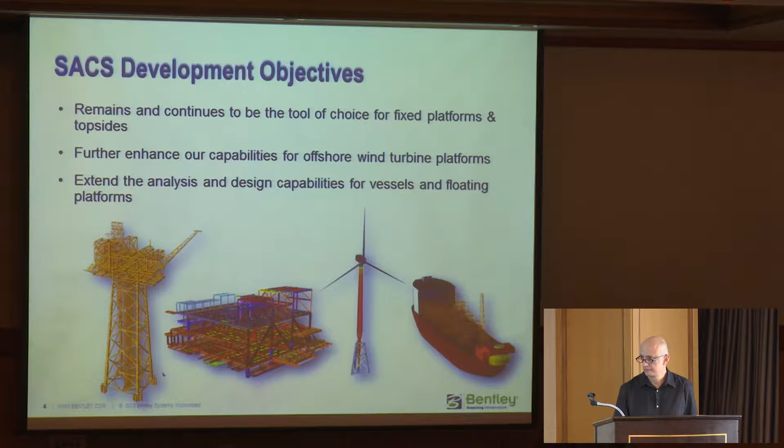And with the Moses product, we want to extend the analysis and design capabilities for floating platforms.

And here's a brief timeline of our releases since we've been acquired by Bentley.

In November 2011, we released the SELECT version of 5.3. This is essentially the same as the version you had with the dongles, except for a few minor bug fixes, still based on dongle licensing.

Then in May 2012, we released 5.4.

And in December 2012, we released 5.5.

In October 2013, we came out with 5.6.

And then earlier this month, we released the 5.7 release.

So briefly, let's discuss how we go about balancing our development.

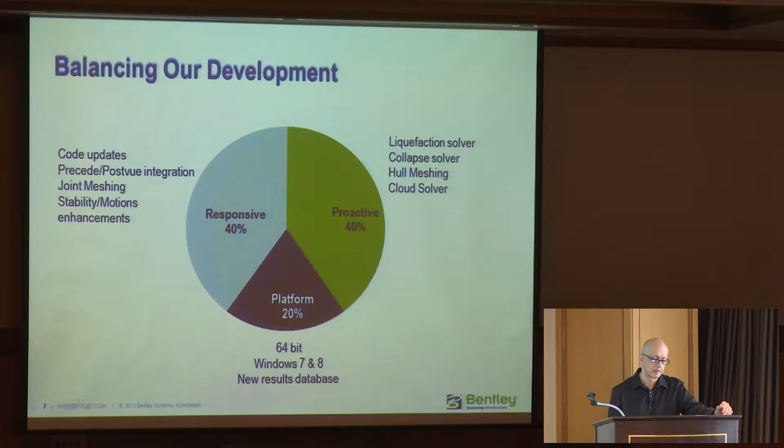And by proactive, we mean items that we think you may find useful for your engineering to make you more efficient. And platform updates are such as moving over to a 64-bit processor, moving on to Windows 8.

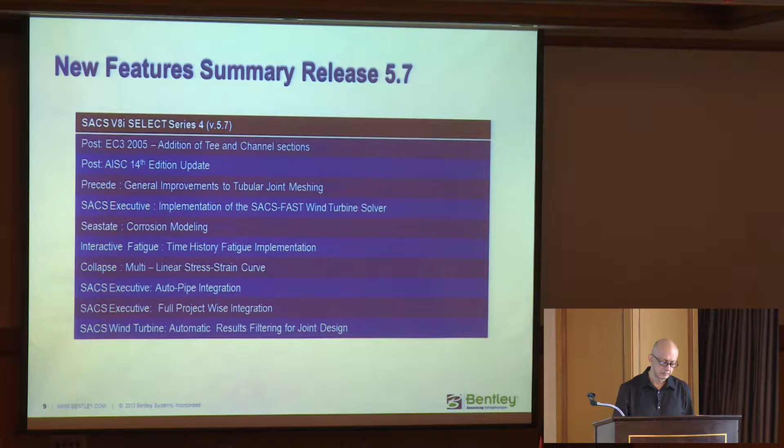I'll go through some of these in detail. Looking at post-processing first.

Basically what we've done with 5.7 was we continued developing our Eurocode. In this instance, we added two section types to the Eurocode itself. And on top of that, we also implemented the AISC 14th edition.

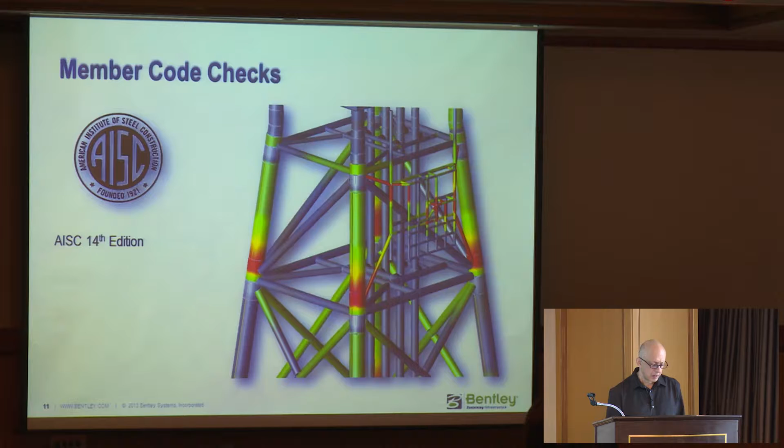In addition to that, we've continued our improvements in non-tubular joint meshing. The meshing capability allows the user to vary the mesh density, and the user can also define measurable lengths of each member.

Now we've been meshing tubular joints for a while, I think since 5.3. This video shows how easy it is to mesh a tubular joint and include it in the overall SACS model.

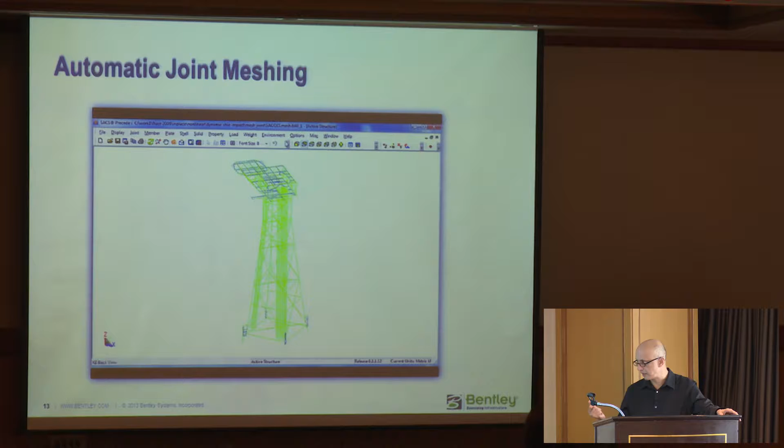The user simply selects a joint out of the model and basically clicks a button, and it'll automatically mesh that joint and insert it back into the model.

So once we started doing this, we had users coming to us and saying, look, we do a lot of topside design and there are some very complicated joints on the topside that we'd like to mesh.

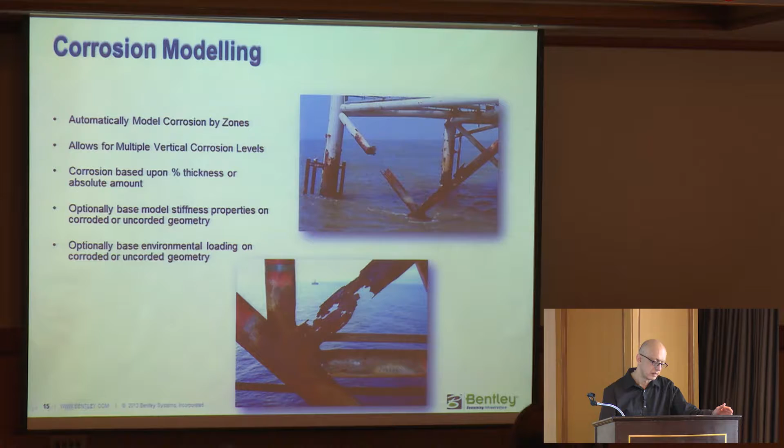Again, this little video shows you how easy it is to mesh joints on the topside. Hang on, let me go back. He won't play. Here we go.

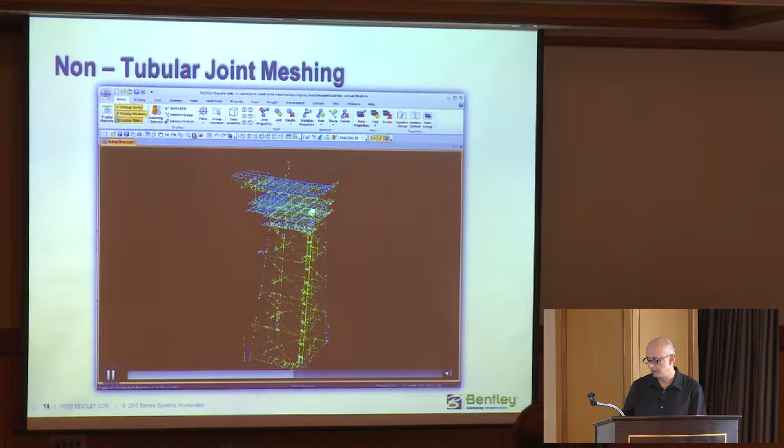Is it moving? Yeah. For instance, say I want to mesh that joint. There's a joint meshing routine called joint mesher in Precede. You simply select the joint, and here you can actually change your mesh density and the lengths of each element that needs to be meshed.

The actual meshing algorithm will mesh that joint and insert it back into the overall model.

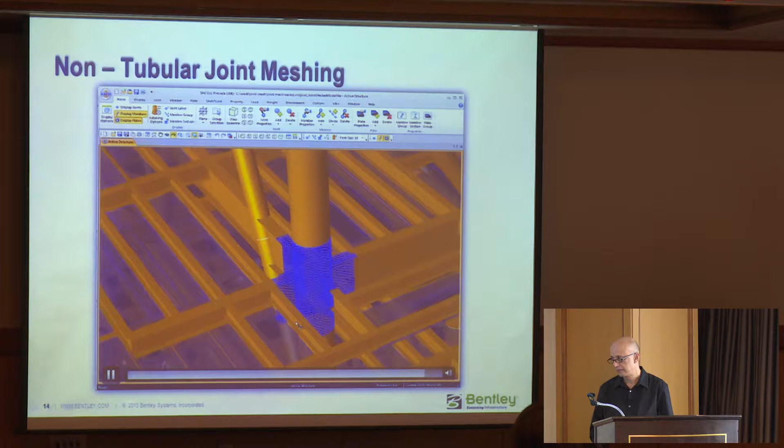Now obviously we can't handle 100% of all different types of joints, but with each release, what we're tending to do is improve or give you more capability on different types of joints.

The other item we added was corrosion modeling. Here the user can model corrosion by zones, which are vertical zones, and you can have multiple levels with different amounts of corrosion. You can base the corrosion on percentage thickness or an absolute value.

The user can optionally base the stiffness properties either on the corroded model or the uncorroded geometry. Also, as far as the loading is concerned, this could be based upon the corroded or uncorroded geometry.

Note here, you're not actually going to change the dimensions of your model. We'll do that automatically for you internally.

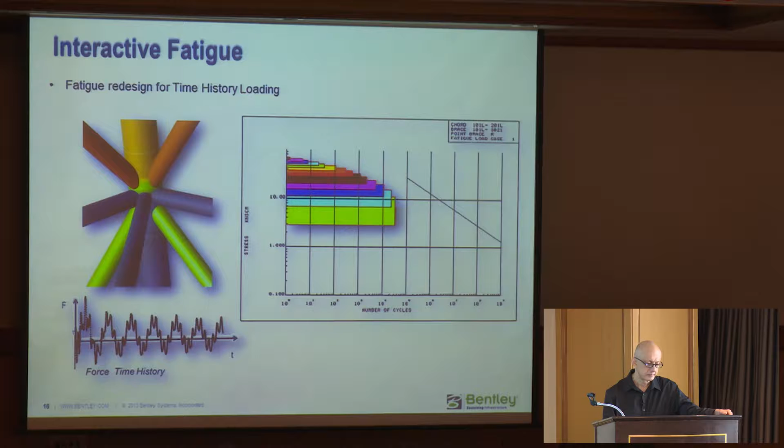Looking at the enhancements to our non-linear capabilities, in particular the collapse program.

In the past, we've only been able to handle bilinear stress strain properties. With 5.7, we've increased the capability to allow the user to input a multilinear stress strain. This should give you a much more accurate prediction of failure loads.

The other update we made in 5.7 is an interface to AutoPipe. This was requested by a lot of our users who design topsides for FPSOs. They wanted a capability where they can take piping loads and transfer those directly onto the support structure in SACS.

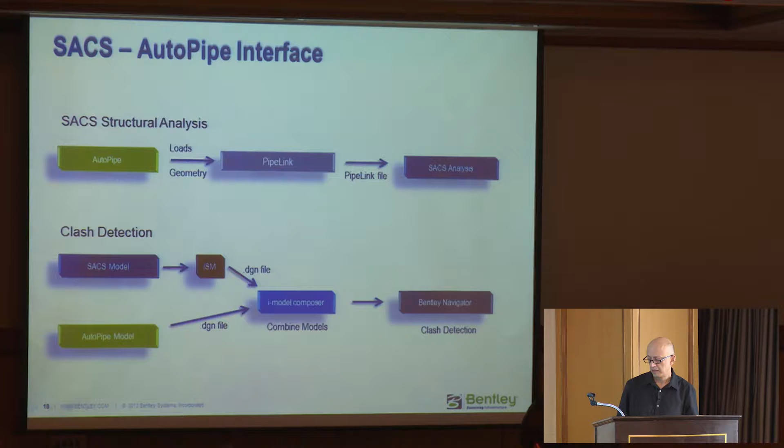AutoPipe can generate the DGN file directly, and again we put this into the iModel Composer and combine the two models.

Then what we can do is use the Bentley Navigator to detect where there are clashes between the piping and the structure itself.

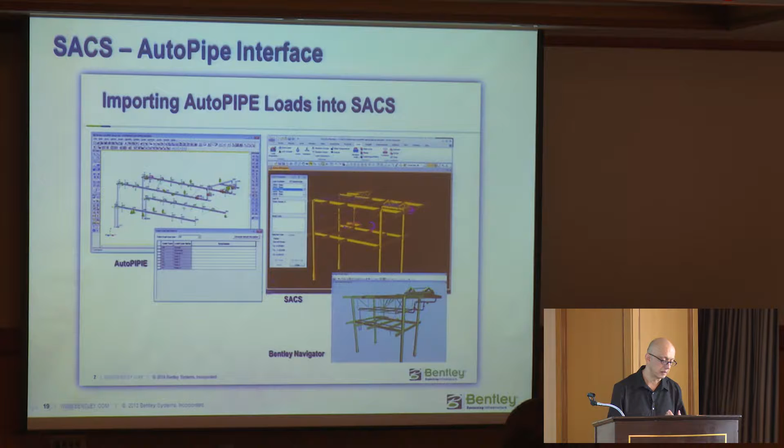This little movie here will show you how the AutoPipe link works. This is your structural model with the piping rack, and this is your AutoPipe piping model in AutoPipe.

So in AutoPipe we can export to pipe link. In this case we're going to export the load cases into pipe link. Once we've done that, we can export the geometry to an MDB database.

Once we've done that, we can import the pipe link file into SACS.

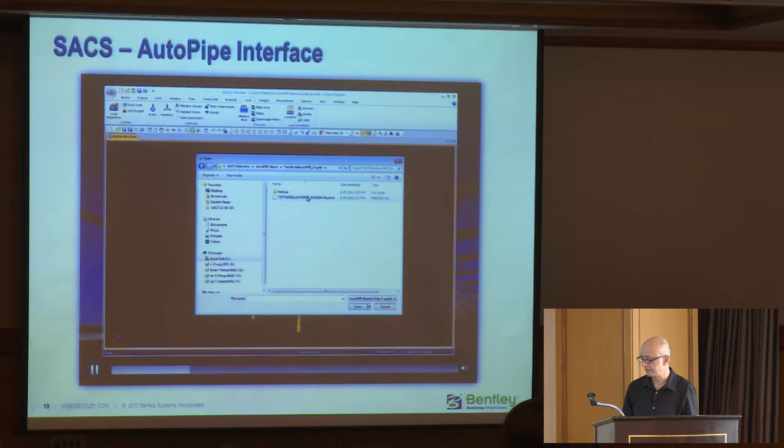Select the file, and these are all the load cases that have been brought into SACS. Basically now we can look at all the load cases, here they are.

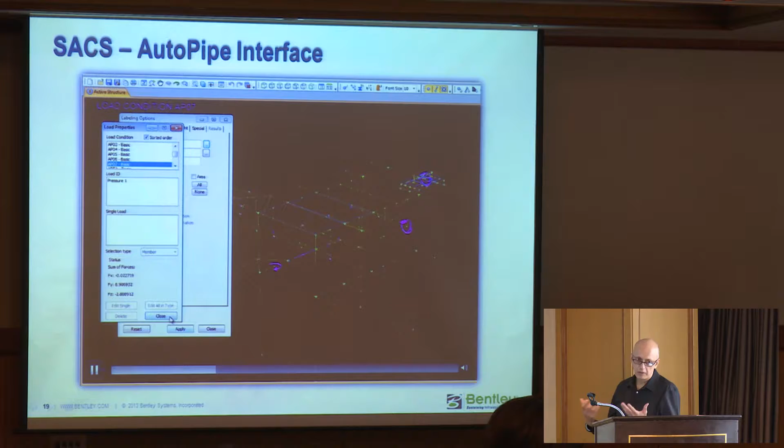So once you have this, you can now go ahead and do your structural analysis in SACS using those loads.

Now this is showing you the second portion, where we take the SACS and the AutoPipe files and put them into the iModel Composer. That was the SACS model in ISM.

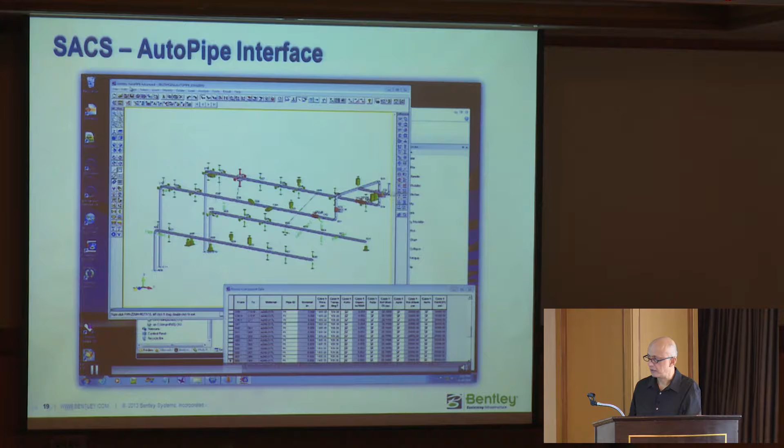And this is, we are exporting the piping model now to a DGN file.

So once we have these two models, what we can do is bring them into the iModel Composer. The idea is to bring the two models and combine them into a single model.

This is the SACS structural model, and now we'll import the piping model.

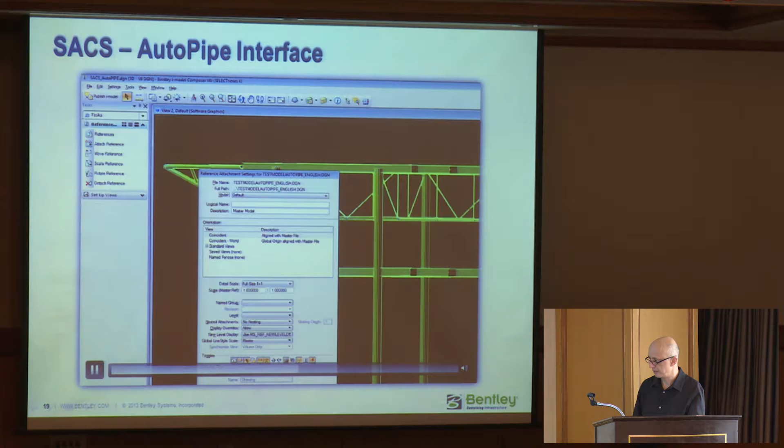And you should see both the models. Here we go.

So these are the two models, the piping and the structural model, combined in the iModel Composer.

Once we have this, then we can now export these into Bentley's Navigator.

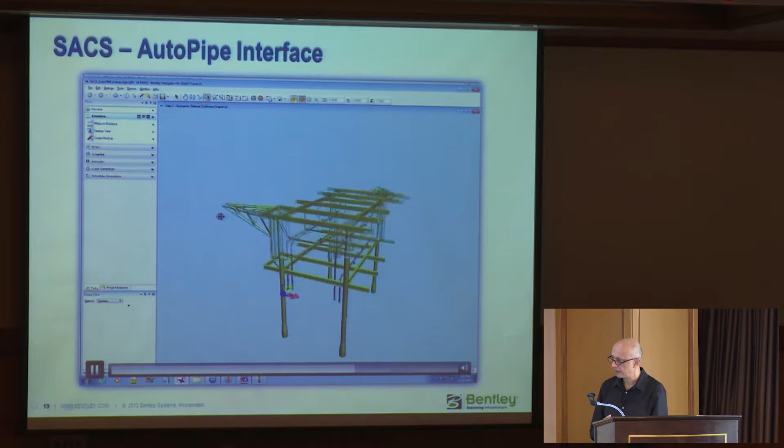We select the file. So here you have both the models together now in the Navigator software. And now you can look at areas where there are clashes.

So if we detect, do a clash analysis, we can see the blue areas are where you have a clash between the pipe and the structure. There we go.

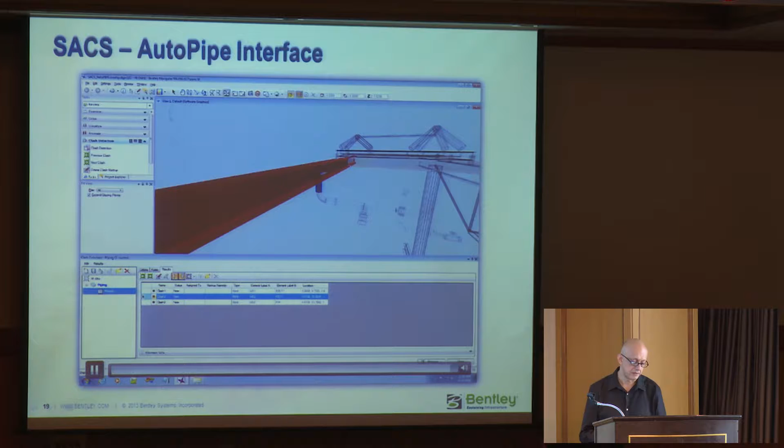By the way, you can take the Navigator and put it on your iPad or your iPhone and take it on site. And once you're on site, you can check the areas where you're going to get clashes and make modifications.

The next update we made, as Clark sort of said, was we linked SACS to Bentley's ProjectWise software.

Does anybody know what ProjectWise is? Anybody use ProjectWise here? Okay, let me describe what ProjectWise is before I start this.

ProjectWise is what we call a collaboration tool. Say, for example, you're working on a project and you want to share documents, drawings, analysis information, your analysis files between different teams on the project.

And ProjectWise will let each team collaborate and make sure you have the latest files, the latest documents.

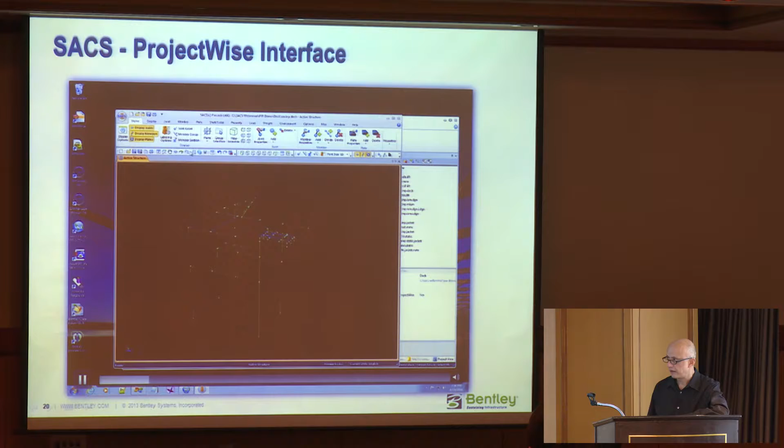So once he's done that, he can check his model against what's up on the server in ProjectWise. Once he does that, it'll automatically show there are differences.

And he then has a choice to merge the two models, modify the database, or actually delete it, in addition to creating a new version.

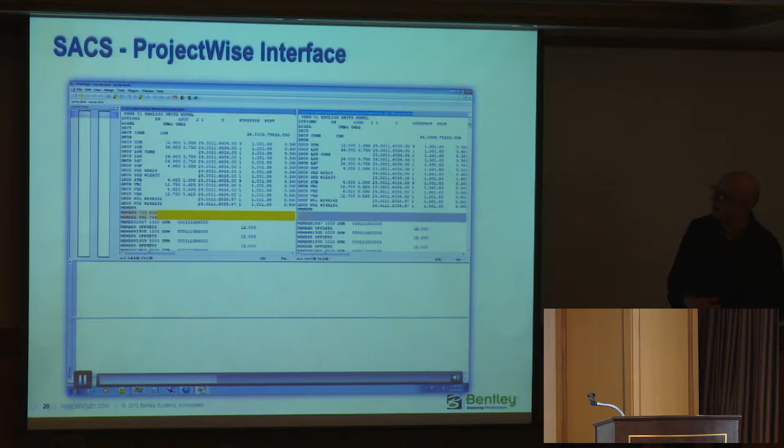So now once he modifies it, he can see the differences visually between the two models. And he has the choice to update the model on the server or not to update. It's up to him what to do.

And he can actually select specific updates he wants. He doesn't have to select every update. Now, this basically shows you all the information on the updates.

And now we're going to move on to user 2 in a minute.

The actual system records all the various last versions and all the changes, who made the changes, when the changes were made.

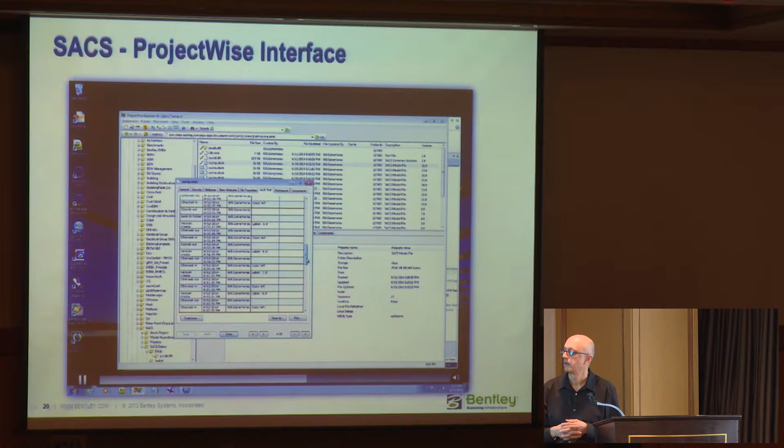And you can also set, how do you say, give privileges to users. Either they can have editing or read-only privileges, basically.

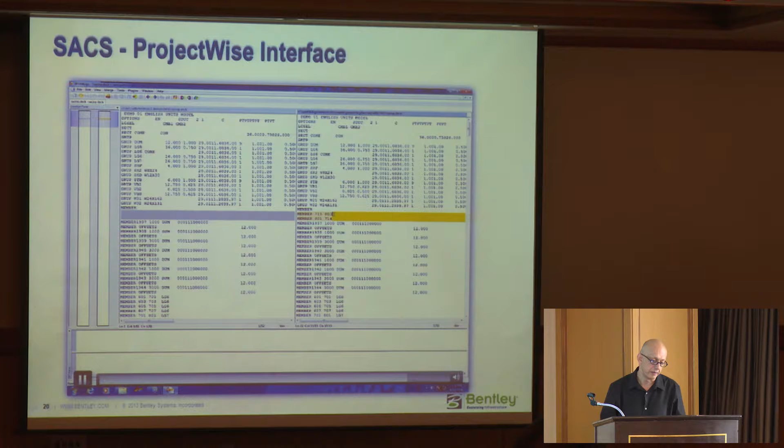He can pick and choose which updates he wants to include in his model from the main one.

And it's not just models. We'll update all your analysis files as well. All your results files will all be updated onto the ProjectWise server.

I'm going to move on to our SACS wind turbine analysis.

We've spent considerable effort in developing this capability here, in particular largely because there are a lot of countries in Europe spending a lot of money on renewable energy.

For example, the UK now gets 10% of its energy from renewable sources, and by 2020 they want to increase that up to 15%.

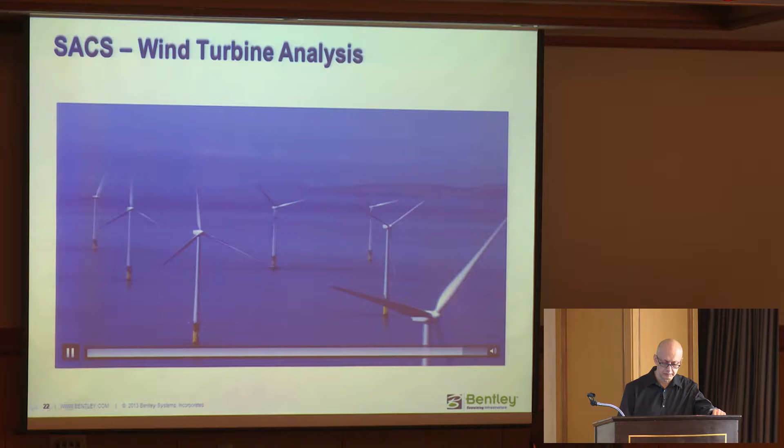So it's obvious for us to move into this area, especially the offshore wind turbine developments.

Now I'm going to talk a little bit in detail about what's involved in offshore wind turbine design.

And during that process, we're going to talk about coupled and uncoupled design.

For example, these are the three loads that act on a typical wind turbine.

We have the wave load on the structure, the wind load on the structure, and the wind load on the turbine.

And the end response of the structure is due to all these three load cases acting at the same time.

For example, the wave load will make the structure move, and this will affect the wind load on the turbine and the wind load on the structure itself.

So all these three load cases are coupled.

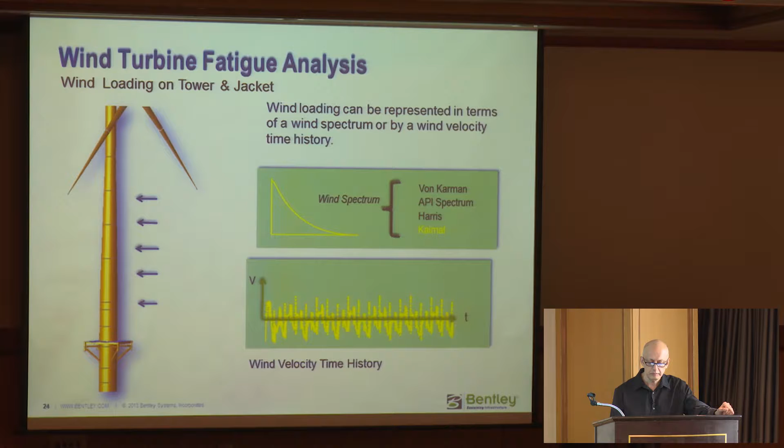As far as wind loading is concerned, in SACS we can model that using either a wind spectrum or a wind velocity time history. The spectrums we have available include the von Karman, API, Harris, and the Kaimal spectrum.

Similarly, the wave loading could be represented either through a spectrum or a wave surface profile time history. The wave spectrums include Pierson-Moskowitz, JONSWAP, Ochi-Hubble, and the user can also input his own spectrum.

If you have a wave spectrum, what we do is subdivide that into discrete frequency bands, and then we generate Airy waves with those particular frequencies.

We combine all those Airy waves with a random phase angle, and this basically results in a random sea surface profile.

And for the turbine... where's my mouse gone to? I lost my mouse. Oh, here we go.

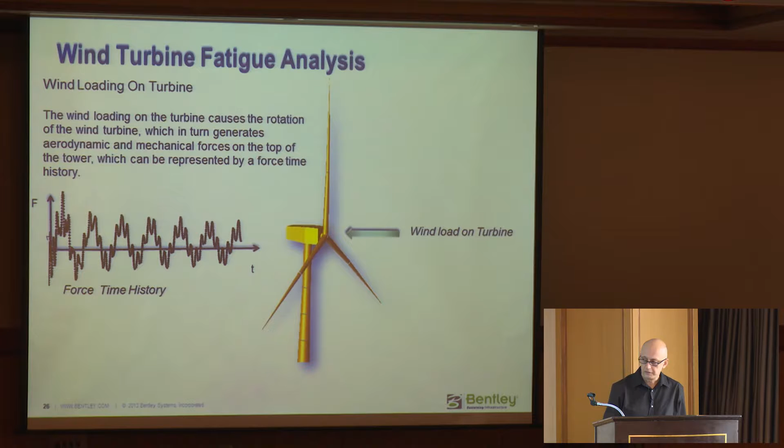Now, the different solutions we have in SACS - provided we have these three sources of loading, that's the turbine load, the wind load, and the wave load, we can go ahead and do a full time history fatigue analysis or a strength analysis.

As Kevin pointed out, we have three options in SACS, and this includes the SACS Wind Turbine process, which is an uncoupled process, the FAST interface, and the Bladed process.

Now, the FAST product is developed by a body called NREL, which is the National Renewable Energy Laboratory in the USA. This is a free piece of software, freely available on their website.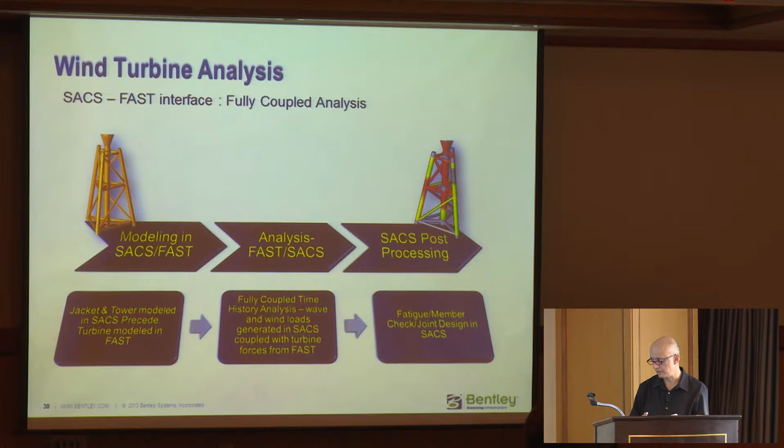And then all the post-processing is again done in SACS - this is your fatigue analysis, your member design, and your joint design.

This gives you a workflow of the SACS FAST interface. The user is first going to conduct a modal analysis.

Then basically run a wave response analysis to generate the generalized forces on the structure from wind and wave loading.

Using these forces, we run FAST to get the tower top shear forces and the turbine and blade motion.

Following that, we run wave response again to solve for all the loads.

Once we have all the forces at all the different time steps, we basically go ahead and do a static analysis.

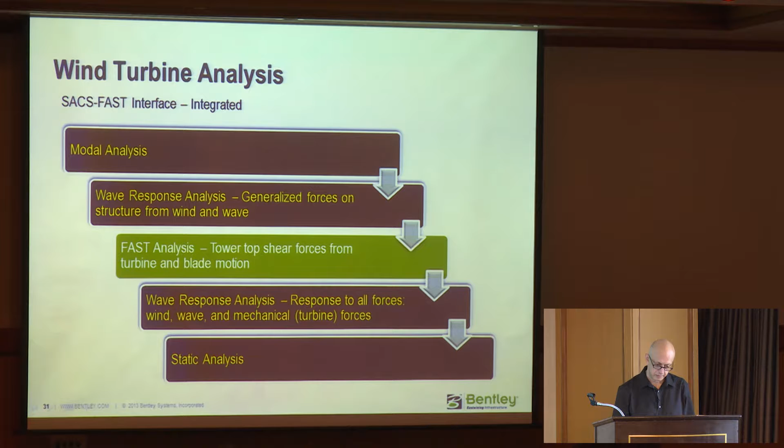After that, we move to static analysis. Looking at each of these steps, the overall workflow is to linearize the foundation first. For a typical wind turbine, you want to linearize the foundation. Then you conduct a modal analysis, followed by the SACS FAST analysis, and finally a fatigue analysis.

To linearize the foundation, we use exactly the same process as for a jacket type structure. Basically, you have your model file and your soil input file.

And another file which has your reference loads to generate the super element - this is the Seastate file. Then you run a PSI analysis to generate your super element.

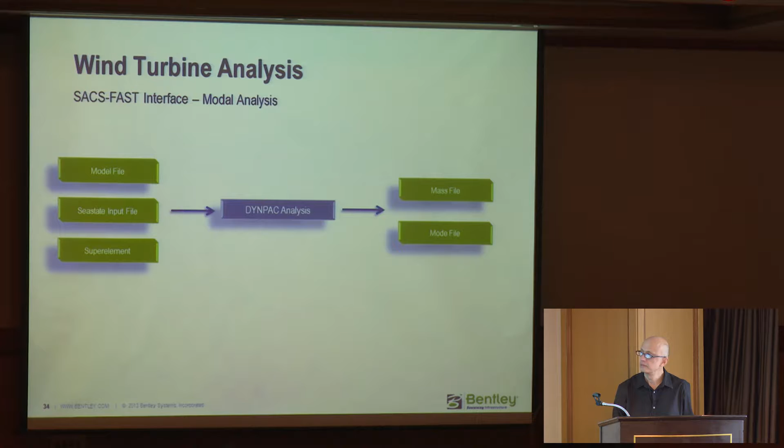Once we have these files, we can use all of them, including a wave response, the wave surface profile, and a fast input file, to run a SACS FAST analysis. This results in a common solution file.

Once you have the common solution files from different analyses, from different loadings and different directions, then you can do a fatigue analysis.

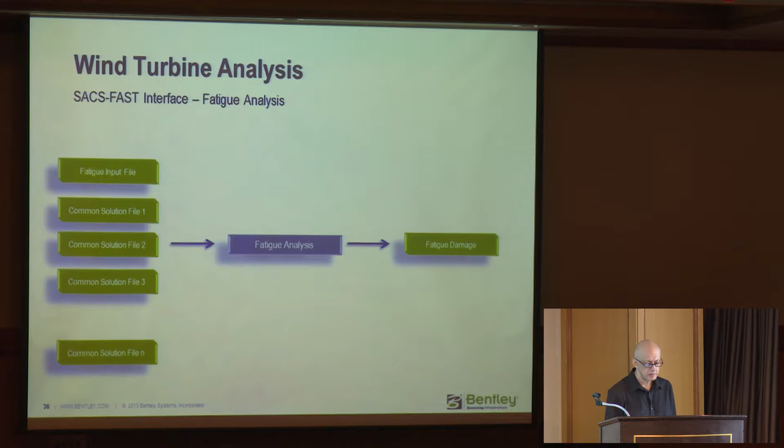Just briefly looking into some of the input files needed here. This is your typical wave response input file. In this case you have the joint JTOWR input line, which describes the tower for the wind turbine.

And the FAST line defines the time history integration. So basically these are the various parameters.

On the WAVTIM line you have your analysis time and analysis time increment. This is basically your FAST input data, and again this is a joint specification that defines your tower.

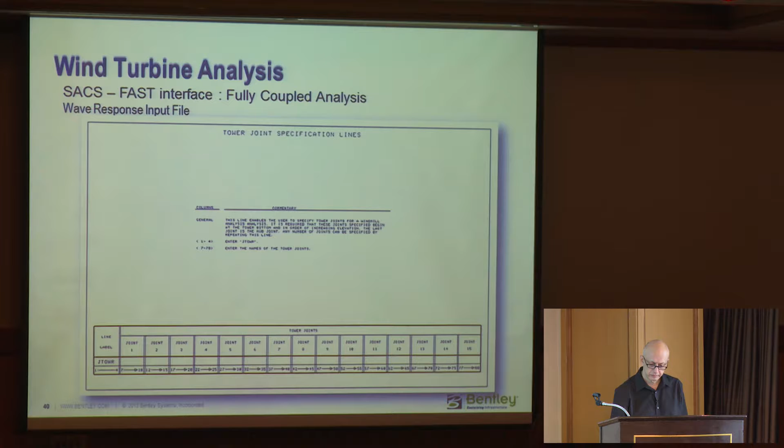Looking at some of the important files for the FAST program, the first is the fast input file. This contains information on the turbine control options, the initial conditions, and turbine configuration.

The second file contains all your tower properties. The third file contains all the properties of your blades. And the last file contains your aerodynamic properties.

And this is again some of the important fast input files. For instance, this is the fast input file, and here you define your time increment.

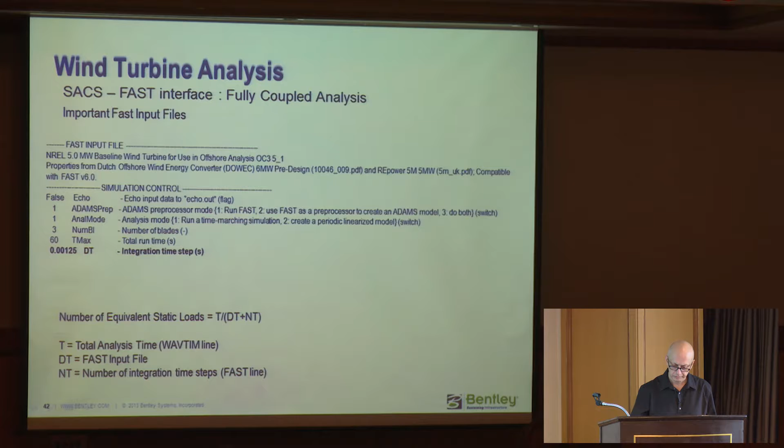Once you have your time increment, you can figure out the number of time integration steps, the total number of time integration steps. And again, this is some output produced by FAST.

We have a tower file which contains your mode shapes and generalized masses. And we have a load time history file which contains your tower top loads.

And your response file which contains the displacement time history at the top of the tower.

This is a typical SACS FAST run. We'll show how to run SACS FAST. Basically you go to the utilities menu.

Then you choose the SACS FAST analysis. Once you've done that, you simply start the analysis, build the run file, and provide the files.

Here we're picking up our mode and mass file. And now we're going to pick up, I think, the fast input file.

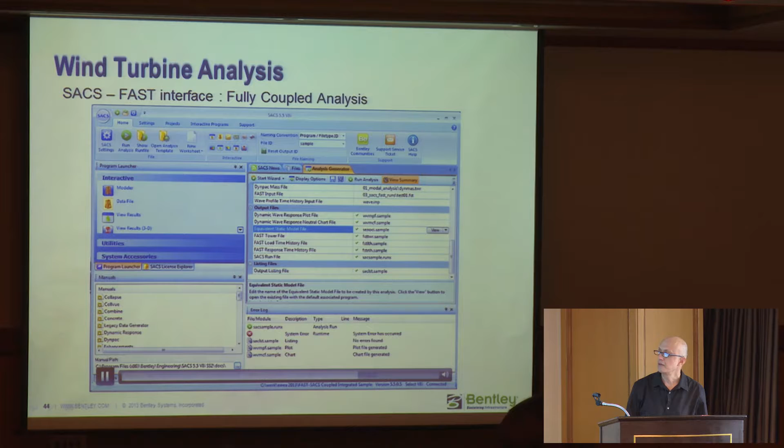You can either use that, or we also produce an CSF file which contains your model plus the loads at each time increment. These are some outputs produced by the product, including your input time history moment, the wave surface profile, and overturning moment, and so forth. It's as simple as that.

Now looking at the strength analysis, again we have a similar process to the fatigue analysis. We linearize the foundation and do a modal analysis, then a SACS-FAST analysis, and then we do a static analysis.

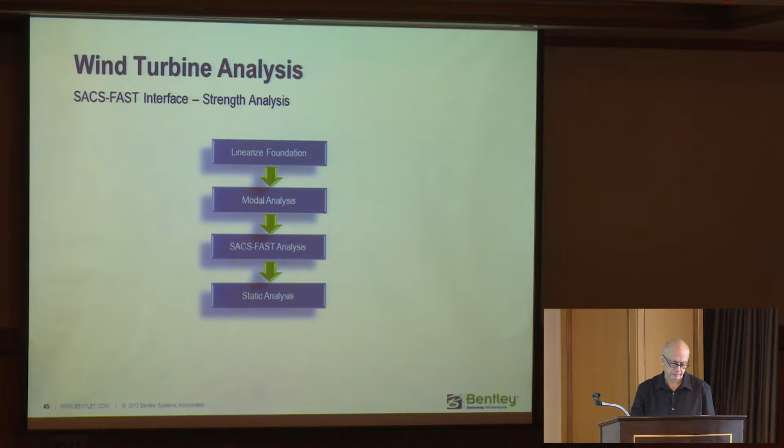For the SACS-FAST analysis, you're going to need your mass and mode files, your wave surface profile, and the fast input file. Then you run the SACS-FAST analysis to output an CSF file.

Once you have the CSF file, you can do a regular static analysis on all those loads at all those time steps.

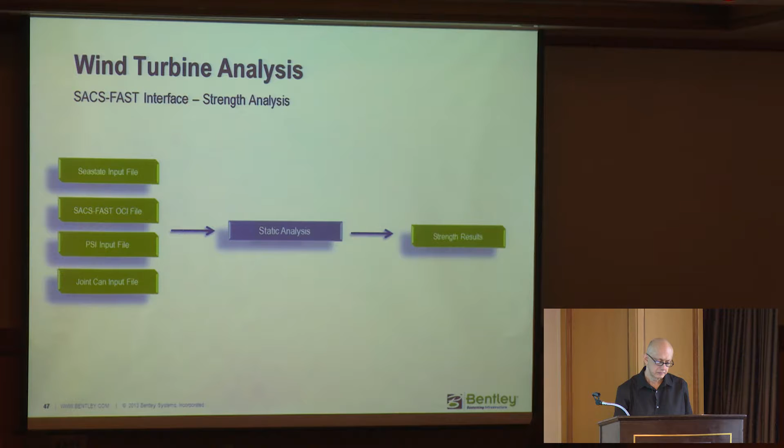Now we've been working closely with Lloyd's Register, not just on this, but some of our other analysis types, such as the uncoupled analysis process.

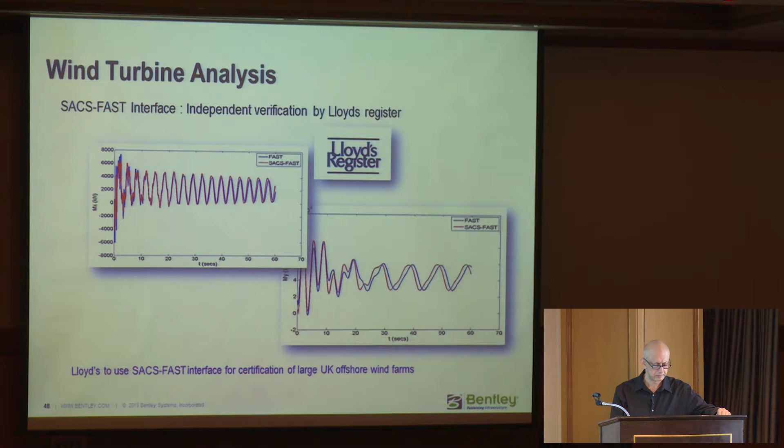Moving on to the SACS-GH Bladed interface. I just want to point out the analysis for wind turbines is completely different to what you would do for a jacket type of structure in the oil and gas industry.

This is a typical input for a fatigue analysis of an offshore wind turbine. A typical fatigue analysis will contain 1,500 time histories.

Each time history simulation runs for 600 seconds, and typically the analysis time increment is 0.05 seconds.

In this case, this will result in 12,000 load cases per simulation. So basically, for the 1,500 time histories, we end up with 18 million load cases.

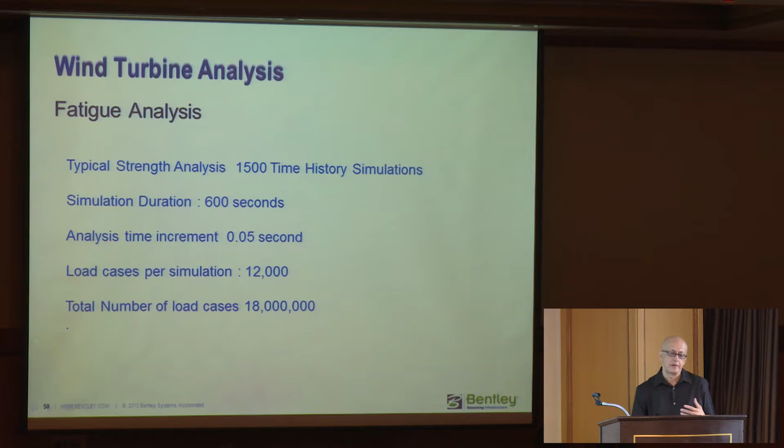So this is an extremely time-consuming process involving a lot of user interface. What we've done in SACS is develop an automated, fully coupled analysis process to minimize user error.

By the way, in this case, GH Bladed came to us to develop this interface, largely because Samsung Heavy Industries asked them to come to SACS to build it. GH Bladed has all the capabilities to do your hydrodynamic analysis with the nonlinear foundation.

GH Bladed has the capability to do nonlinear foundation hydrodynamic analysis, including modeling of the wind turbine itself. But it contains no post-processing capabilities. It can't do fatigue analysis, strength analysis, member design, or joint design. So what we do with SACS is build both a front end to GH Bladed and a back end.

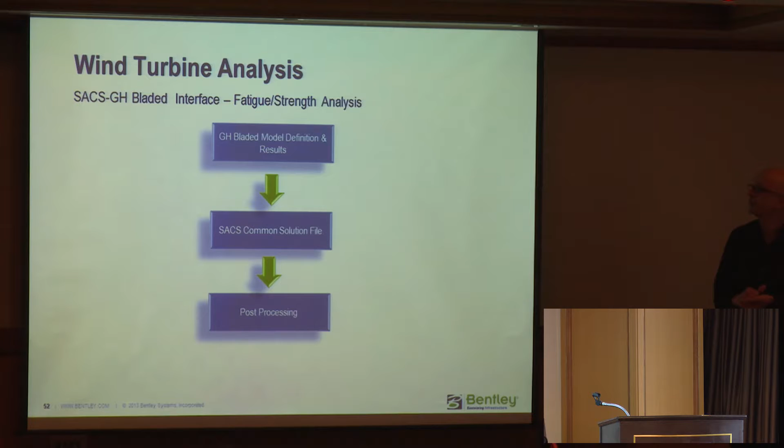This is again a typical workflow. You get the GH Bladed model definition and results, and we take those into SACS. Once we have the model and the results, we build a SACS common solution file. Once we have the common solution file, we can do all the post-processing.

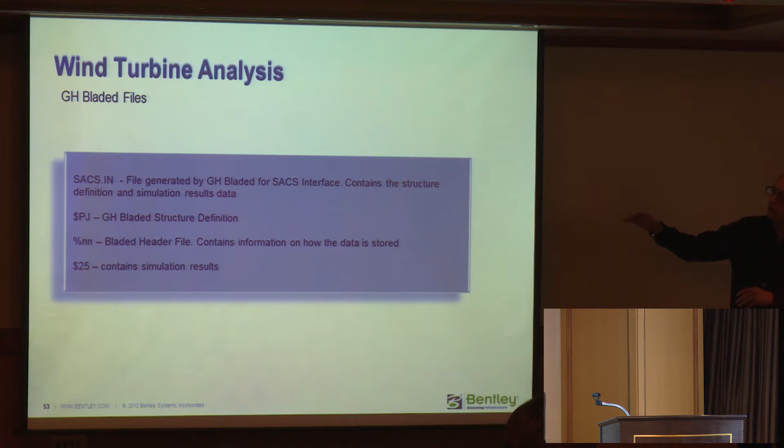Now the files that are needed are basically a SACS.IN file. These are GH Bladed files. The SACS.IN file is especially created by the GH Bladed program for SACS. We also use the $pj extension file which contains your structure definition, and the percentage extension file contains information on how the data is stored in their files. The $25 file contains your simulation results.

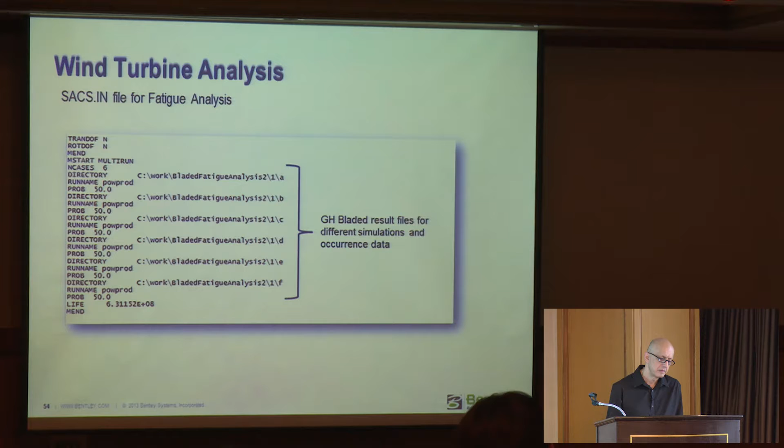This is a typical SACS.IN file. In this case, we're looking at 6 simulations. The directory line specifies where the GH Bladed result files are stored. You can also group the runs by using a run name - for example, you can have power production, idling, or give different runs different names.

The probability line defines the probability of occurrence for that particular simulation during the lifetime, or design life, of the structure. Basically, you have information on all the different simulations in this SACS.IN file.

The last line, the lifeline, is basically the design fatigue life specified in seconds. In this case, that represents 20 years.

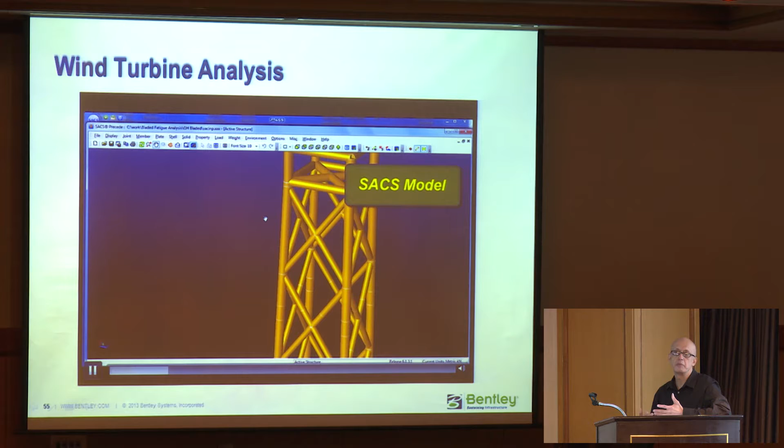So this is a typical model in SACS - basically you have your tower and your jacket. Once you've generated this, it won't take you very long. If you were to generate this in GH Bladed, it would take weeks. In SACS, you could probably do this in a day.

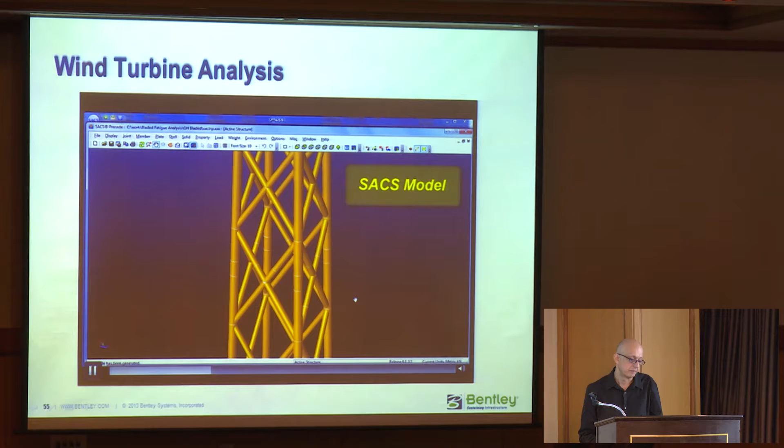Then you simply export the SACS model into a GH Bladed file. This is our $pj file, which contains the GH Bladed model file generated by SACS.

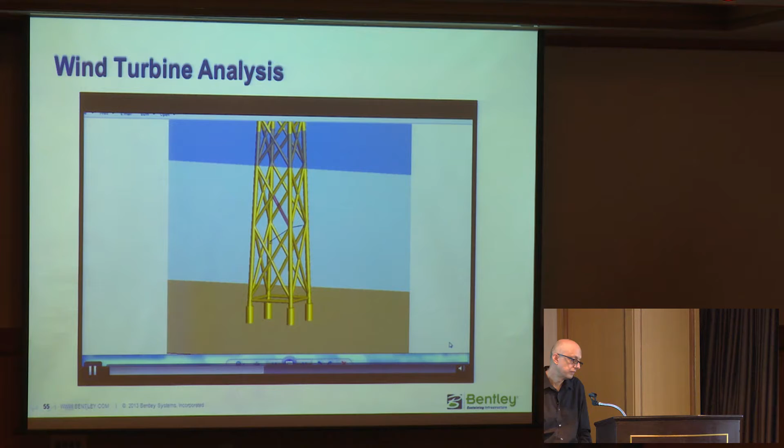This is a typical GH-Bladed input, and this is a screenshot of the same model in GH-Bladed.

The next step for fatigue analysis is a two-step process. The first step is to generate your common solution file. Once you have your common solution files, then you can go ahead and do a fatigue analysis.

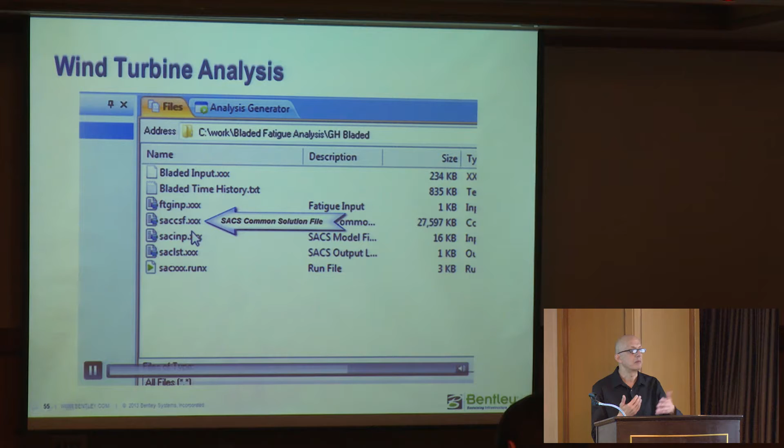You would go into the utilities, and then generate a GH-Bladed fatigue common solution file. What I'm showing you here is a manual process, not the automated process.

Once you have the common solution file, the next step is to do a full fatigue analysis.

What we're doing is a time history fatigue analysis. In other words, we're doing a rainflow count approach for your stress cycles and number of occurrences. So these are your typical fatigue results.

Once you have the CSF file, this common solution file, you can do your member checks.

Now, obviously, you're not going to do all of these one by one. You're going to have 1,500, 3,000, or 5,000 of these simulations.

So in SACS, what we did was we automated the whole process to do this automatically for you.

Basically, we use the control file that's generated by GH-Bladed, and we provide a partial fatigue input file and the GH-Bladed results. Then we go ahead and do a multi-core analysis and a fatigue analysis.

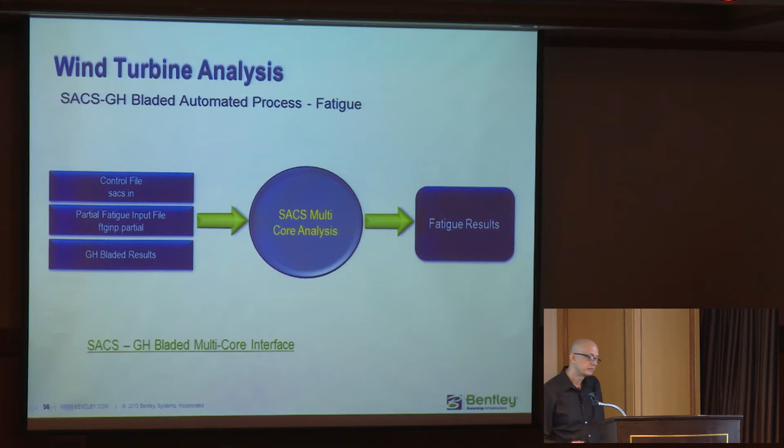So the typical fatigue input file - basically the important parameters here are your SCFs and SN definitions. These elements are included importantly in the fatigue input file.

Now, looking at a strength analysis, a typical strength analysis requires about 5,000 time history simulations.

Similar to the fatigue analysis, the simulation duration is 600 seconds, and your analysis increment is 0.05 seconds, which results in 12,000 load cases per simulation.

In this case, we have a total of 60 million load cases.

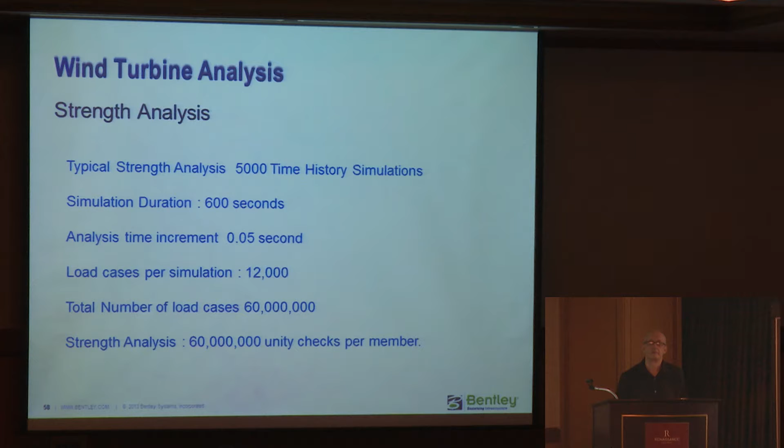That's 60 million unity checks per member in the structure. So you have to sort through 60 million unity checks to find the maximum unity check, or the critical condition.

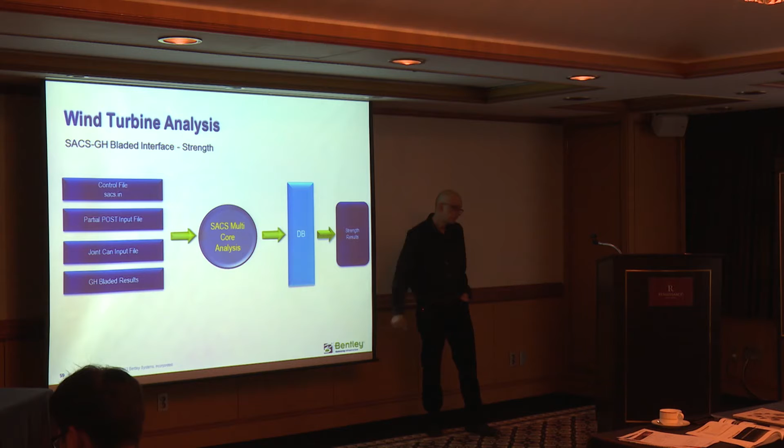In this case, what we did is introduce a database at the end. So once we have all the unity checks, what we do is automatically...

Flag F at the top of the file to indicate this is a fatigue analysis.

And again, you define the location, the directory location where you have your files, including the name of your common solution file.

And again, you can define groups as far as each simulation is concerned. You define groups so we can give you the damage per group.

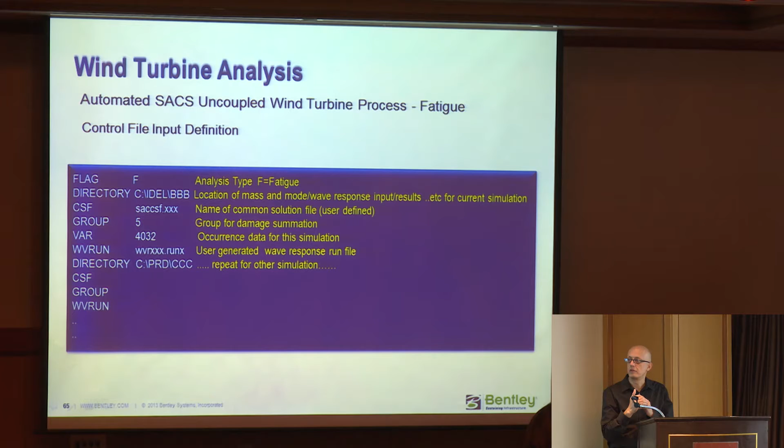In addition to the total damage for the structure.

The VAR line again is your occurrence data for the simulation.

And then you have your run file, basically the name of your run file. And you repeat this for all your different simulations.

And this file is very easy to generate, provided you keep all your file names the same.

The only thing that may change is your directory location and your occurrence data.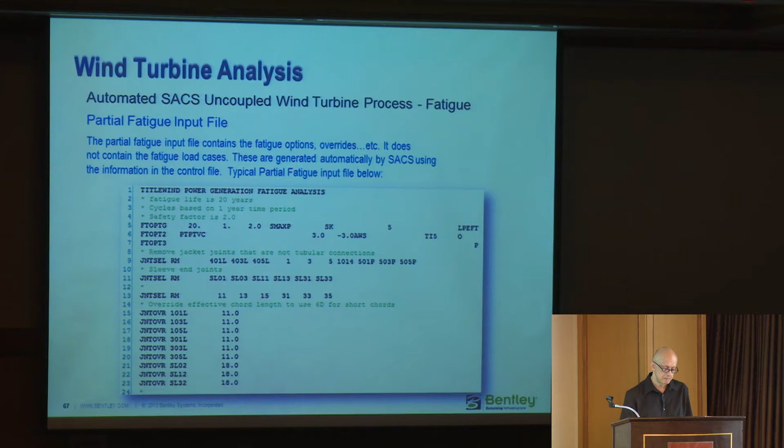And basically, this contains your stress concentration factors and your SN definitions.

And so this is how the process works internally in the automated process. Basically, you have your wave model file and your wave response input file.

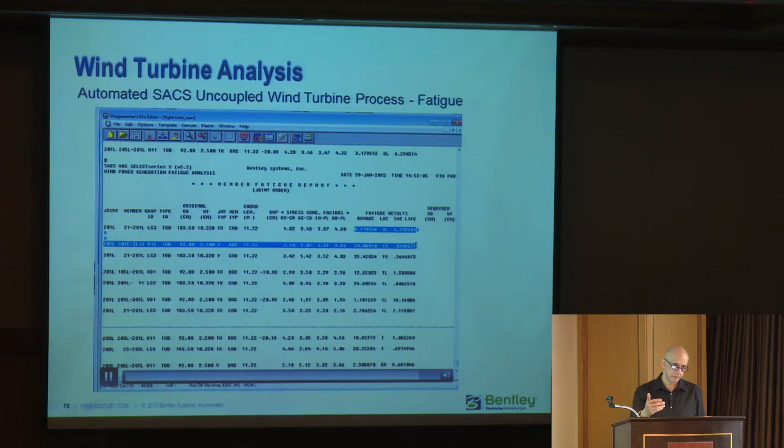So it's very simple to run, basically. We try to keep user interaction as minimum as possible - that effort is reflected here.

This is to reduce human error creeping into the process, to prevent people from making errors in the middle of this process.

Similarly, for the strength analysis, we use a database as well.

This filters all your results to give you the critical unity checks.

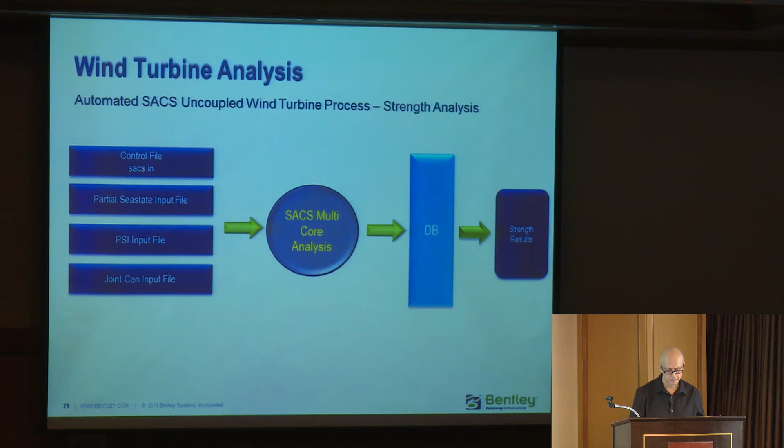This is a typical control input file. In this case, we have a flag S - if you see the S flag here, that indicates it's a strength analysis.

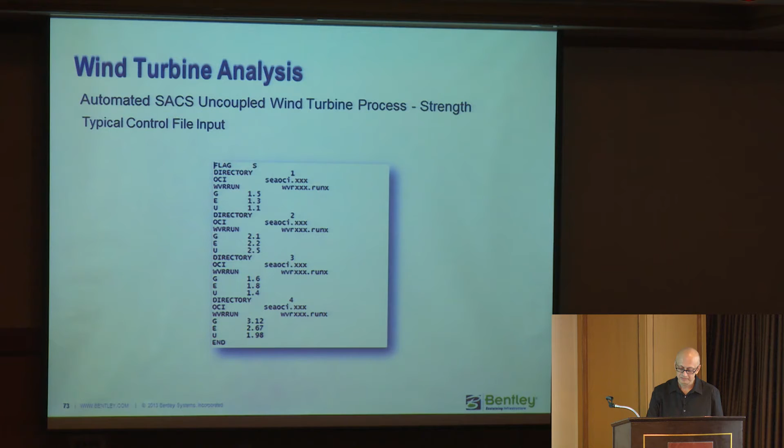This is an example control input file containing 4 simulations, a typical control file input covering all the simulations.

This is your partial seastate input file.

This contains your hydrodynamic modeling - in other words, your marine growth, your coefficient of mass and drag.

All your dead load cases are also included here. This is the self-weight of the structure and any other undefined mass on the structure.

What we do is very similar to our fatigue analysis - we have our wave surface profile, the force time history, then run a wave response analysis to generate an OCI file, similar to the fatigue analysis process.

Once we have the OCI file, we use that as an equivalent model file.

This file contains all your time history loading at the different time steps.

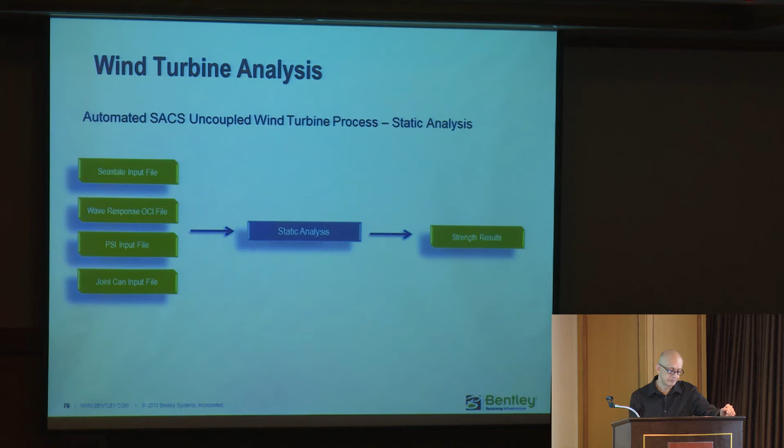You can use your PSI model and your joint can input file to do a full static analysis, combining the PSI input and joint can input to perform the static analysis.

This is a typical strength analysis using the uncoupled process. In this case, we only have 4 simulations.

And once we finish your analysis, we pass all the results into a database. Then we filter the database and give you the critical unity checks.

I want to look at a little bit at the multi-core capabilities in SACS. In version 5.4, we included the multi-core capabilities only in the SACS wind turbine package. With 5.5, we made it available in the SACS offshore enterprise package.

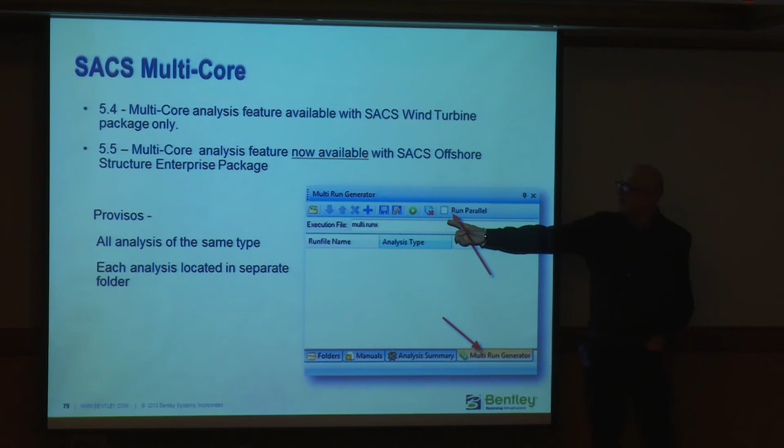Basically what you would do here is you go to the multi-run generator, and you will put all your run files in here. You will check the run parallel box, and then you will set up your multi-run. This will spawn off a parallel process.

The only conditions are all the analysis types have to be of the same type, and each analysis has to be located in a separate directory. This is basically to stop any file access conflicts, because we use a lot of temporary files.

Now, you're not going to get the same improvement from all your different analysis types. Some of these SACS analyses do have a lot of read-write to the hard disk. So if you have many processes, they're all trying to access the disk at the same time, and this causes a bottleneck.

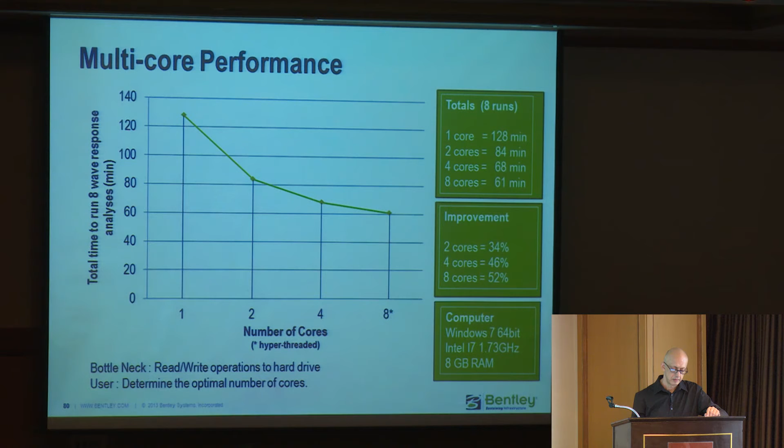So what you would do before you do this is actually calibrate what gives you the maximum performance, how many cores gives you that. This is a typical time history analysis we did in SACS, and in this case we're outputting results at 0.01 of a second, to see which number of cores is most effective.

Now, we're moving on to cloud computing, largely to improve the runtime even more than what you would get with your personal computers at work. The cloud offers hundreds and thousands of nodes which you can access at any time.

For example, in this case, we had 500 simulations, and we used 500 nodes. We finished the whole analysis in 3 hours and 13 minutes. If you were using your PC with 4 cores on it, it would take you more than 5 days to complete the analysis.

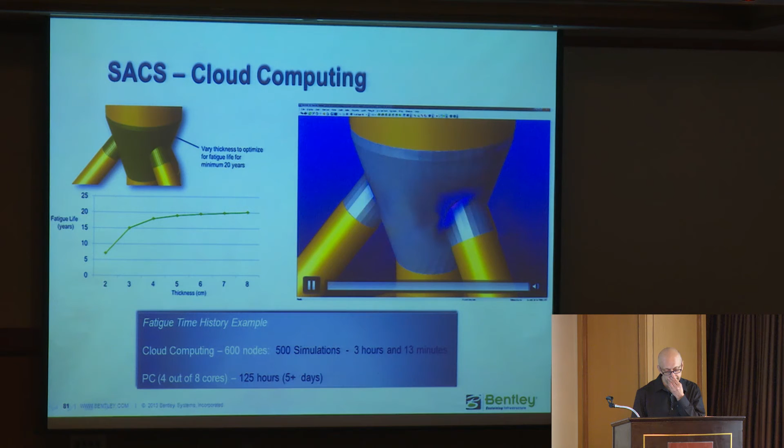Now, SACS is also capable of doing marine turbines. Basically, our interface to the GH Tidal Bladed program gives us the same capability as we had for the wind turbine. In this case, the turbines are driven by the tide which comes in and out day after day, whereas wind energy is dependent upon the weather.

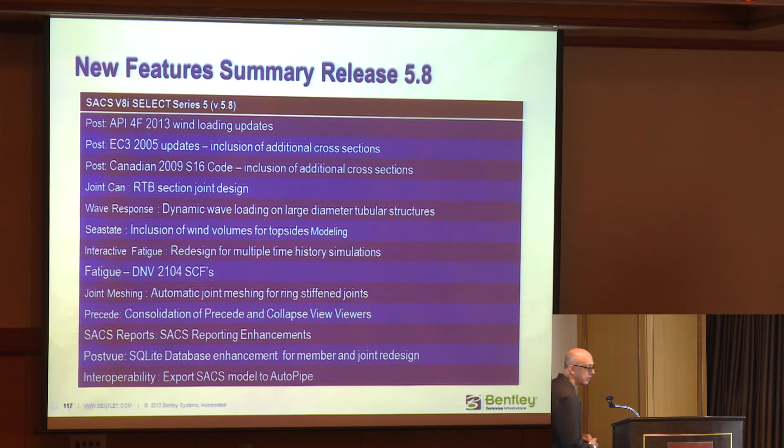Another large improvement is finishing our reporting enhancements, which will be strengthened. Also, as far as consolidating viewers, we hope to have the collapse viewer also consolidated into Precede.

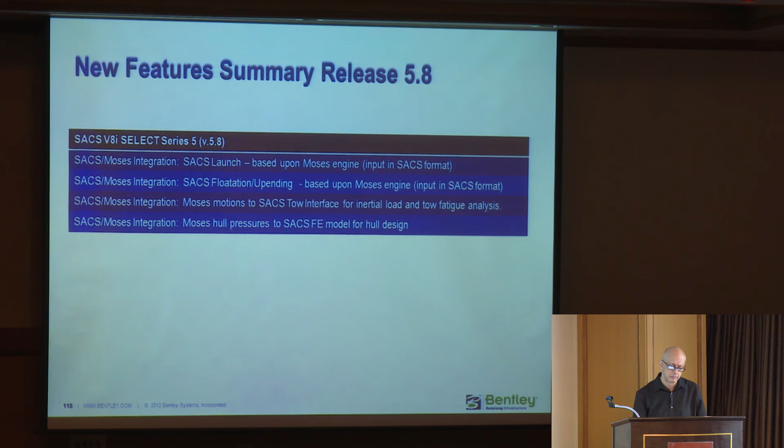Like Clark said, the majority of our thrust with the 5.8 release is to integrate SACS and MOSES closer together. We've already started work on this as far as the SACS tow analysis is concerned.

When we finish MOSES, it will generate a direct input file for the tow program, containing your accelerations and RAOs.

Once you have your accelerations, you can do inertial analysis. And if you have your RAOs, you can go ahead and do your transportation fatigue analysis.

Similarly, we expect to replace the SACS launch and SACS flotation programs with MOSES, since MOSES offers a far more sophisticated solution than the current SACS launch and flotation upending program.

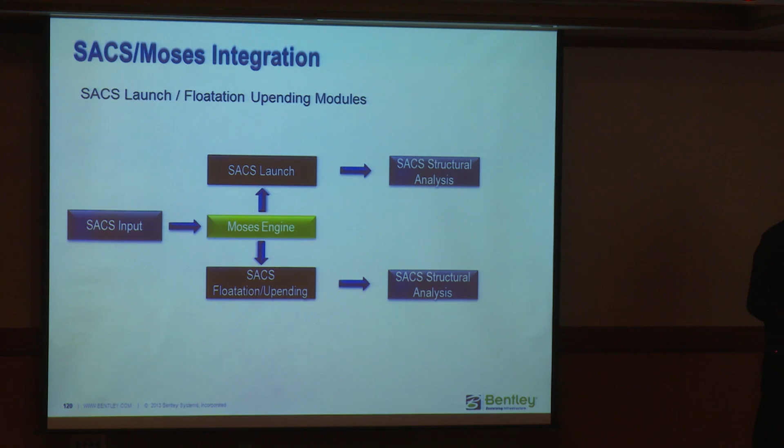So you can run SACS launch or the flotation program and do your structural analysis in SACS, using the existing SACS input for structural analysis.

The other improvement is that we want to go ahead and actually design the hull structure itself. The idea here is to take the hull pressures predicted by MOSES.

Then map those hull pressures directly onto a SACS finite element model, and go ahead and do your structural design for the hull in SACS itself.

Okay, so that kind of brings me to the end of this presentation.